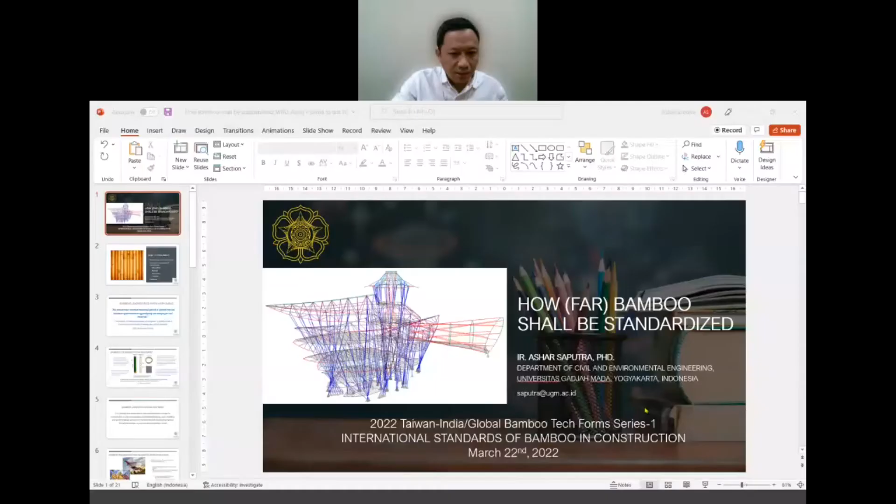Thank you, Mr. Salam. I hope my voice is heard clearly. Yes, okay. Thank you everybody, it's a good honor for me, Mr. Salam, and also the colleagues from Chung Cheng University in Taiwan.

Today I would like to share my experience, also my difficulties during the construction of bamboo, especially for big buildings of bamboo. Before I start, I'm a structural engineer, and my presentation will be much more related to the structural or civil engineering aspect. So hopefully all participants - I don't know how many here have a background in civil engineering, because I think it's much more related to structural engineering.

And I will connect my presentation with the standard code, especially for the building code. At this moment, in my experience, it's difficult to fulfill all the requirements from the code for bamboo buildings.

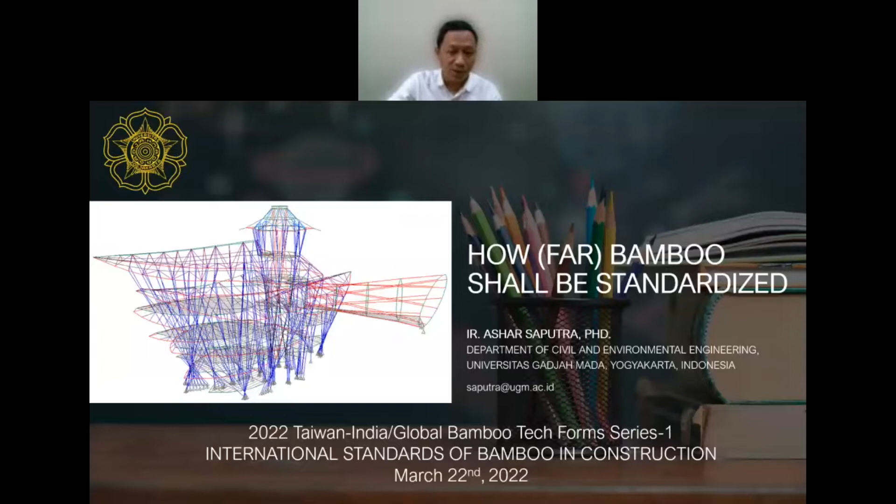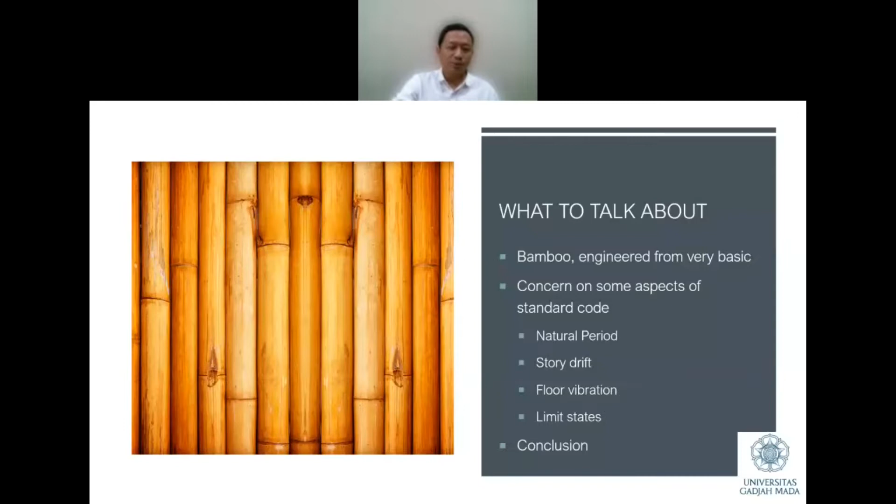I would like to talk about bamboo from the beginning, and then I would like to talk about my concerns on some aspects related to the standard code. I will discuss the natural period of the building, and also story drift, floor vibration, and then I would like to discuss the limit state design - this is, I think, the core of the standard building code. I will not talk about the material itself, because that's already been discussed by Professor Norman. So probably I would like to jump to the standard building code.

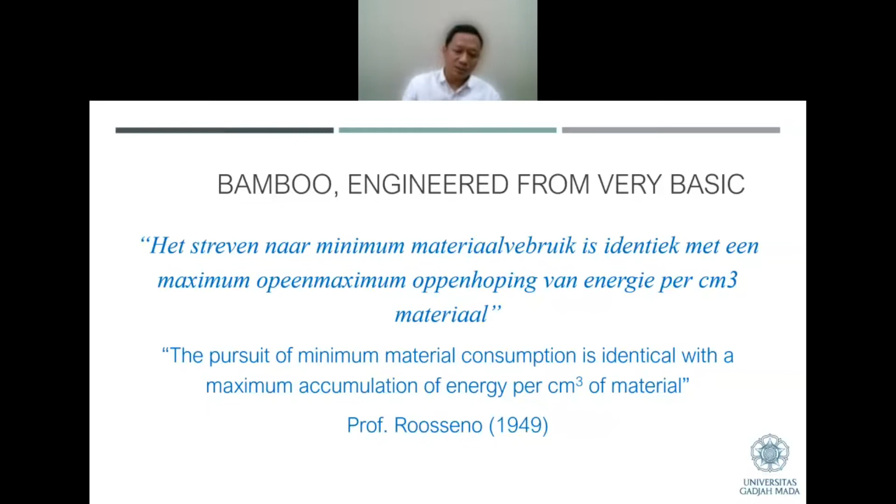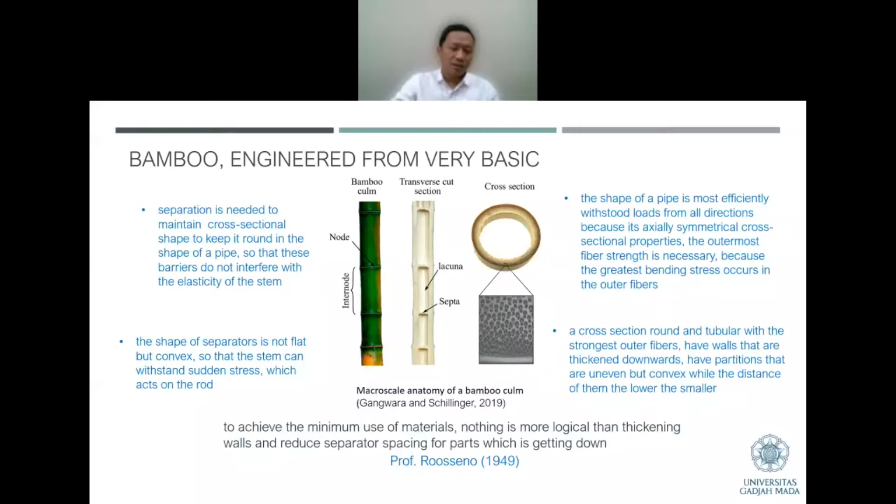Dear guests and all participants, let me start with the nature of bamboo, which is very engineered from the very beginning. I will cite my Indonesian senior engineer, who stated that the minimum material consumption is identical with the maximum accumulation of energy per centimeter cubic of the material. This principle is very, very well depicted in the bamboo material - about the shape, about the cross section, about the separators...

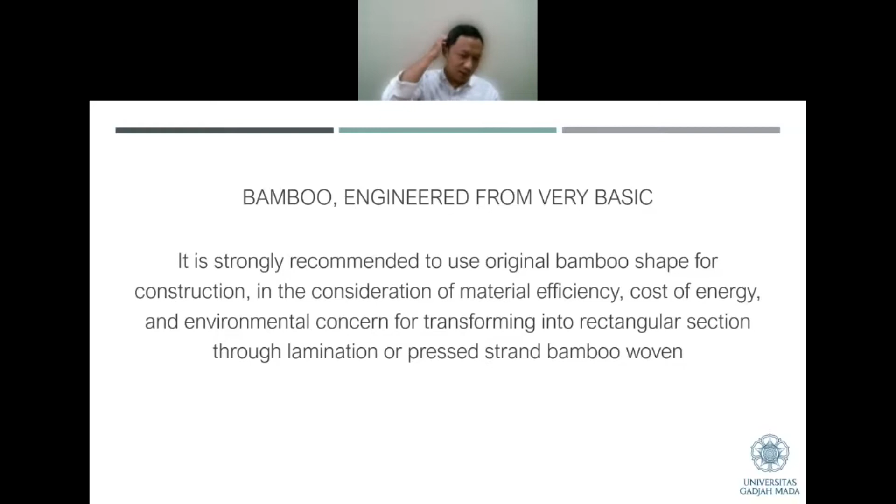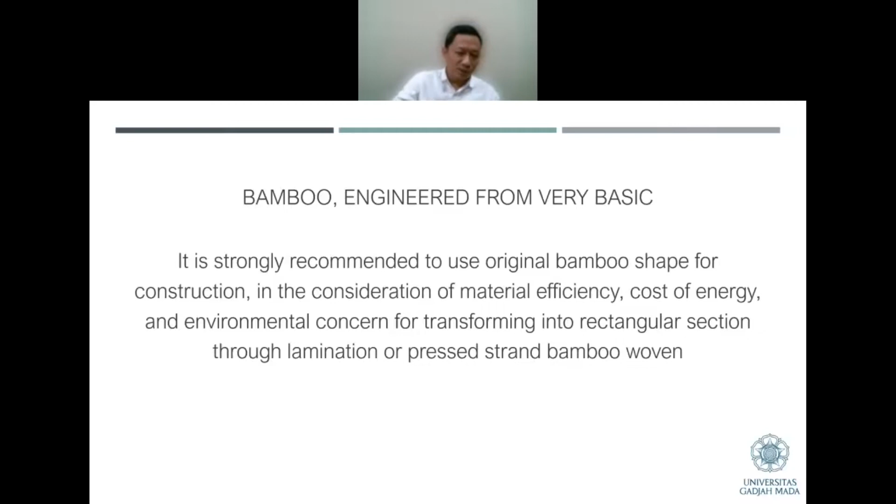It is very good to start from this point. From this fact, I would like to say that it is strongly recommended to use the original bamboo shape for construction, in consideration of material efficiency, cost, energy, and environmental concerns, rather than transforming it into a rectangular section through lamination or pressed bamboo. So I would like to request all engineers and architects to please design bamboo buildings using the original shape. If we try to utilize bamboo through laminated bamboo or strand-pressed bamboo, I think it will not match the requirements for energy cost and environmental consideration. So let's start with the original shape. Originally, bamboo is already amazing, strong, and very good for construction. So this is my opening for understanding bamboo.

So when I'm thinking about the code, I'm thinking about appropriateness. Should bamboo come to be very standardized, or should it just come to appropriateness? How about bamboo building - can we learn something from this situation? This also gives me some kind of insight, because after 10, 14 years dealing with bamboo, it is strongly and hardly difficult to fulfill all the requirements of the standard building code. I will explain the situation case by case, but this brings me to understand that sometimes appropriateness has to be fulfilled rather than only fulfilling the requirement from the code.

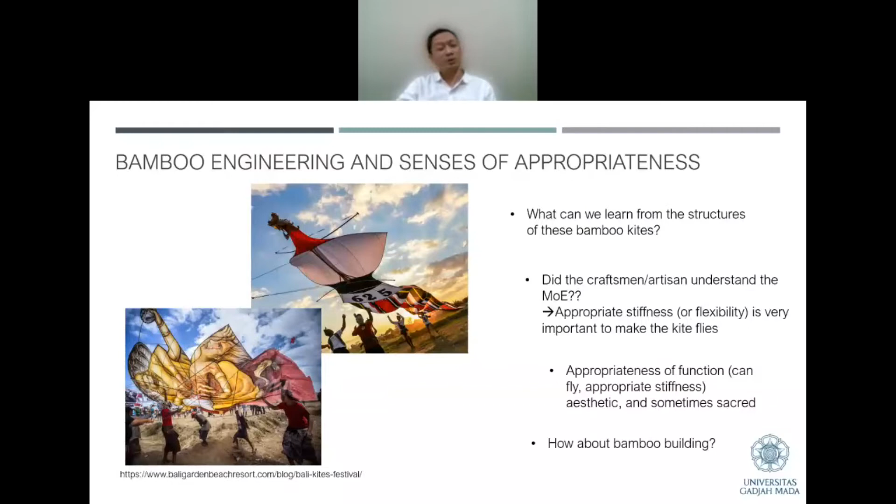So we would like to talk about standard building code in relation with bamboo building. I will start with the design life, and then the fundamental or natural period of building. All these aspects should be taken into account during structural design. Then how about the interstory drift, the floor deflection and vibration, and the wind load? At last, I would like to discuss the limit states, including ultimate limit states, serviceable limit state, and durability limit states. I think this is very challenging for all of us, especially for the architect and the structural engineer.

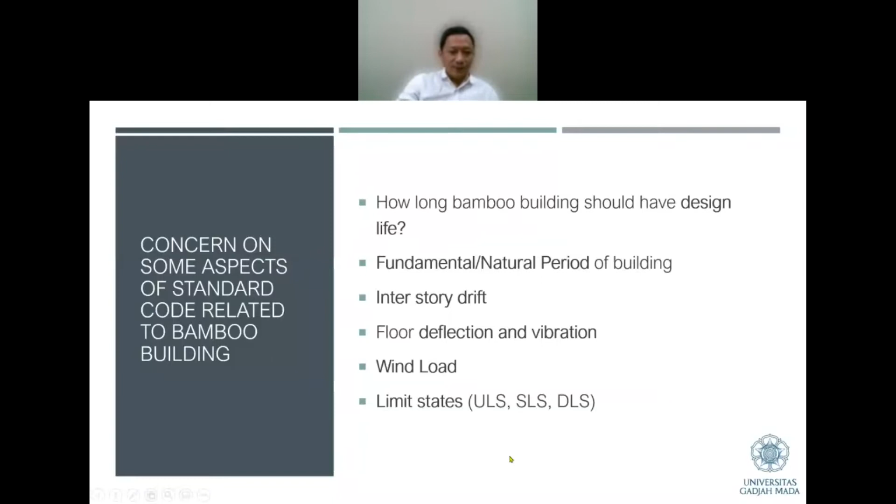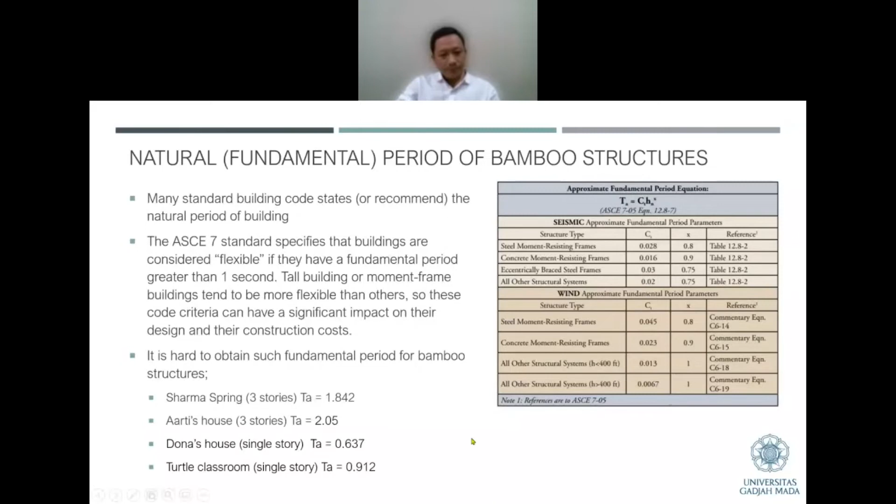I will show you that if our structure is relatively cubical or regular, like the lodge in Belgium, 2011, you can see the shape of the building is much more regular, and we can get the natural period around 0.3. It's a stiff building, and probably not really affected by wind load.

But for the Sharma Spring in Bali, this three-story bamboo building, also constructed in 2011, I got the natural or fundamental period around 1.8. So it is flexible. Sometimes if the wind blows at relatively high speed, probably some sway will happen in this structure.

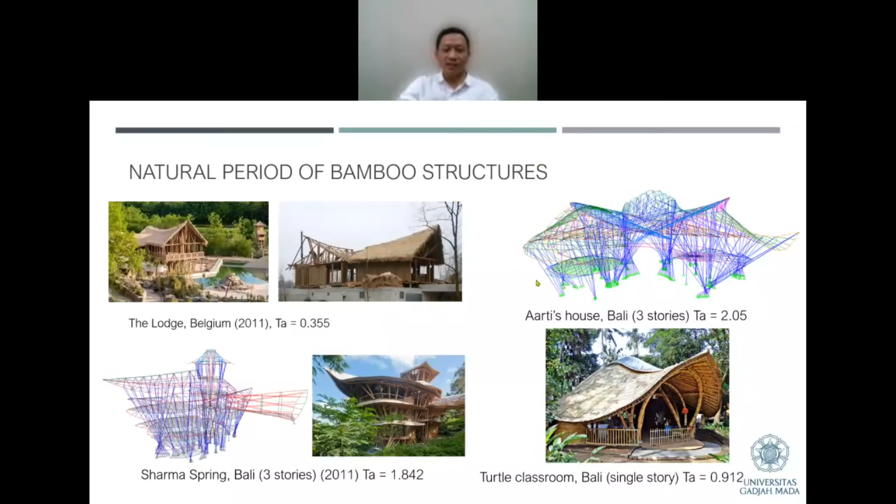For Aarti's House, we get a higher fundamental period due to the heavy mass on the roof system, so we get 2.05. In this situation, the engineer and also the architect have to give appropriate explanation about the design and the natural period of the building.

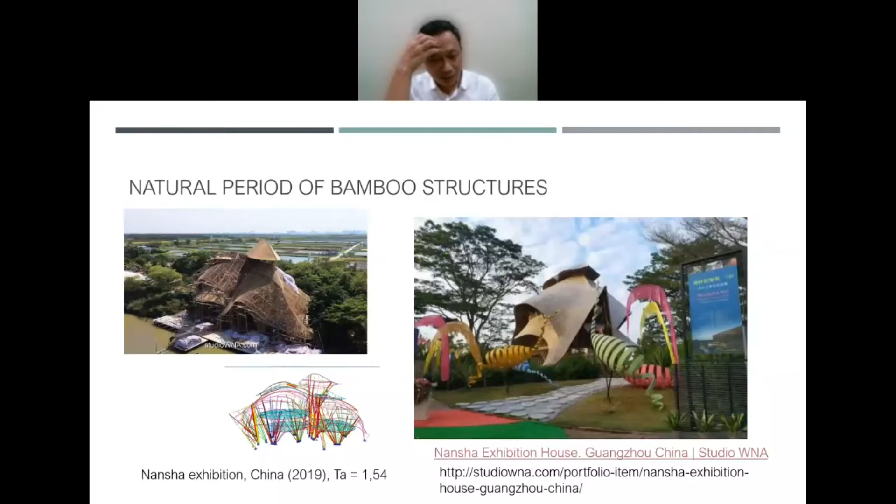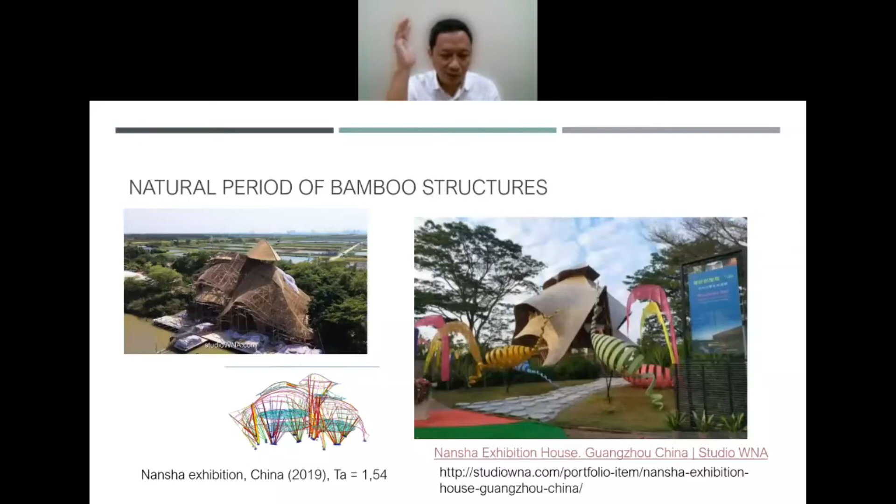The last example is the Nansha exhibition in Nansha Bird Park in Guangzhou, China, constructed in 2019. These pictures belong to WNA Studio, and as you can see, the fundamental period of this building is around 1.5. So this is the situation. In this regard, it's difficult to make our bamboo building become a stiff building, and sometimes a relatively big sway will be received or seen in our structure.

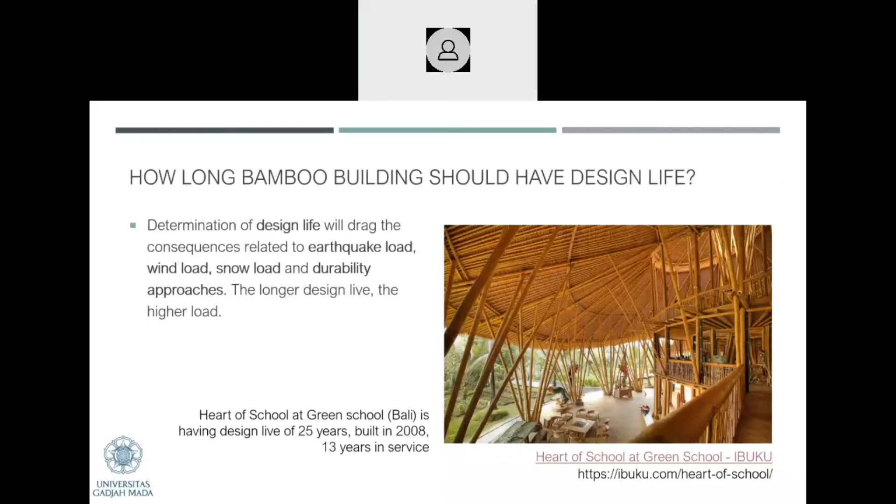In a normal situation, the standard building code for public space or normal buildings usually requires a minimum 40 years design life. But from my experience, 25 years design life will be appropriate in many aspects due to durability and economics. So let's determine between the architect, engineer, and owner about the design life. Don't give misinformation to the owner that our building is designed for 40 or 50 years service life, because probably it will be difficult to achieve.

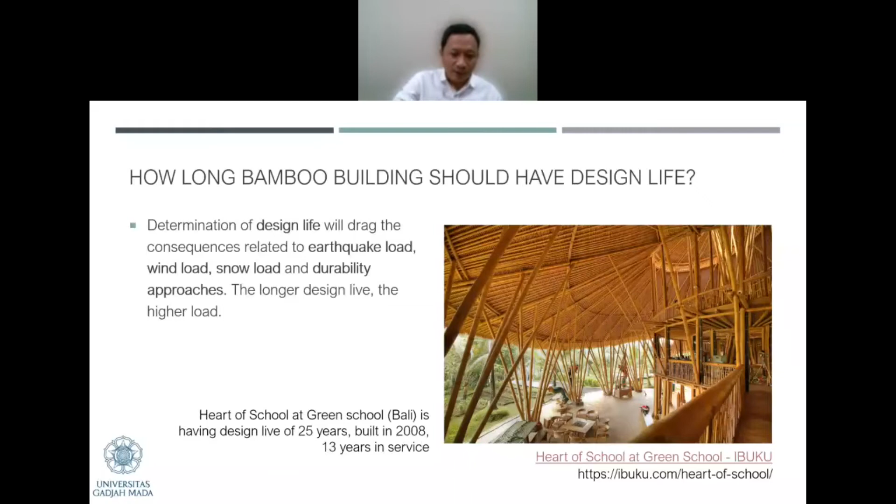The third thing I find very difficult to fulfill from the code is related to story drift, or inter-story drift. In normal buildings, the code states the drift to be 1%, 1.5%, or 2%, related to the importance function of the building. For a hospital, probably only 1% story drift is allowable. For housing, probably 1 or 2%. For office buildings, the code usually states 1.5%. But in reality, it's very hard.

Why? Because in bamboo structures, the connection plays a very important role in determining the inter-story drift. The nature of bamboo, having low MOE, 1/200 of steel or half of wood, has become the challenge in keeping the inter-story drift from being too high. The second problem is related to the property of the joint connection. This is the challenge I'm facing during the construction of bamboo structures.

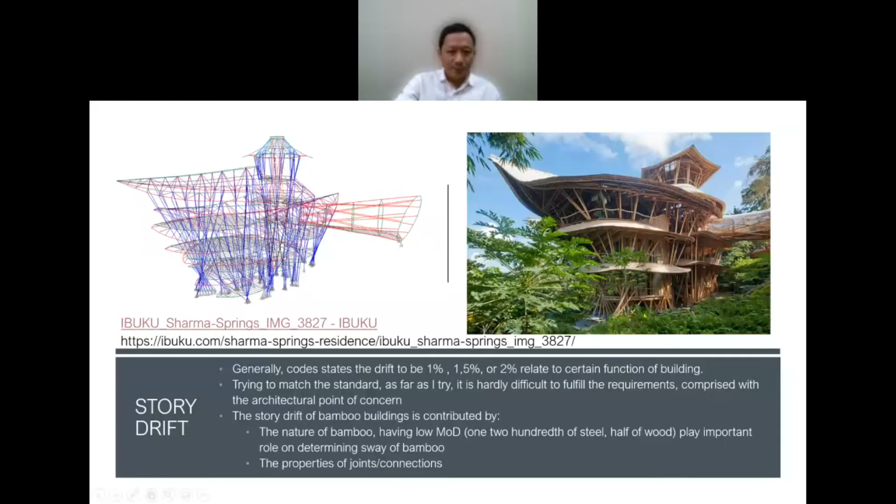The next issue is related to floor vibration or floor deflection. The vibration of the floor relates to the strength, the capacity to withstand load, and also serviceability. Usually standard building code states span over 400 or span over 300. But in bamboo structure design, span over 400 is almost impossible to reach, and span over 300 is also difficult. Span over 250, I think, is the compromise point.

Why? Because if we want to reach span over 400, the floor beam will be very big, and the architect will say, I don't like this big beam. So at which point do we compromise? I'll say span over 250 is the compromise point. But the easiest, and usually what I use as the limitation, is span over 200. It's easier to obtain - the architect will agree, and there will be some vibration and a little deflection, but the user will still be okay with it.

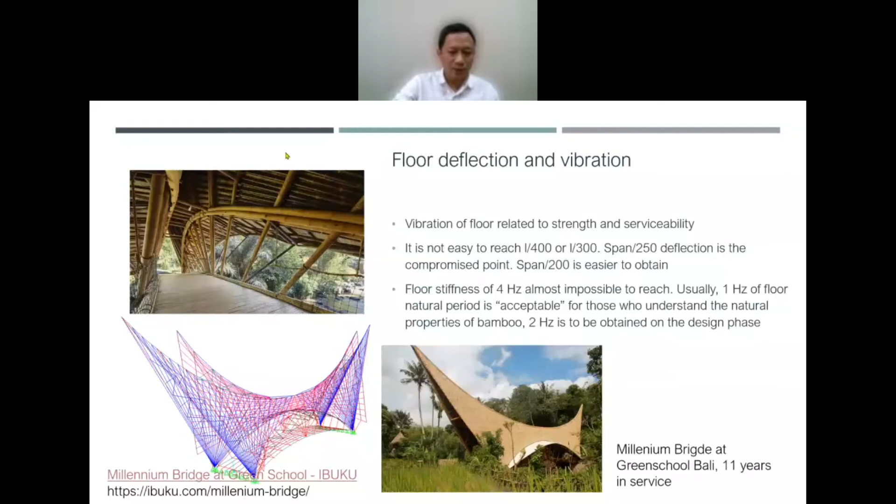Sometimes we have to design arches with a higher curve to get steeper floor vibration or to increase the stiffness of the floor. Yes, this is kind of a challenge in structural design, how to match with certain requirements of the building code.

The next topic is about the wind load. I contacted a client, an architect designing in the sub-equatorial region, which requires a standard load of more than 150 kilometers per hour.

When I came to the calculation and went back to the architect, I said if you ask me to calculate for more than 150 kilometers per hour, then I need, let's say, 6-fold the columns. So what do you think?

Then the discussion comes to an agreement: okay, we can design for 150 kilometers per hour, but we will need some kind of exit strategy, which is when the wind speed exceeds the design speed, some part, usually the roof covering, will be blown away, but the main structure will stay intact.

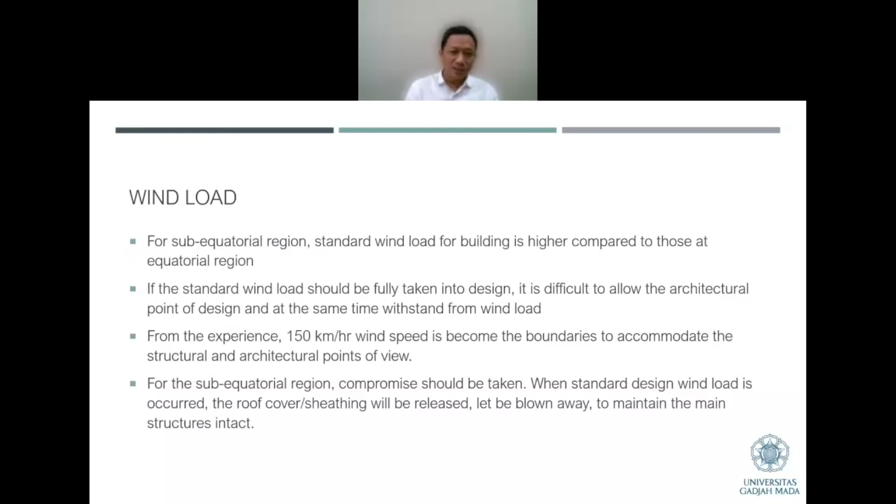Then the user or owner says, okay, I can accept that, so we can proceed to the further step of the design. The architect usually agrees, but the user has to understand the situation about the bamboo calculation, the bamboo properties, and so on. So this is when we discuss the wind load.

Ladies and gentlemen, next I would like to talk about the limit state design for bamboo. The limit state design approach considers that the structure should sustain all loads and deformation liable to occur during its construction, perform adequately in normal use, and have adequate durability.

The aspect of the ultimate limit state is about loss of equilibrium, rupture, and so on, including fatigue. For the serviceability limit state, it includes excessive deflection, excessive cracking, excessive undesirable vibration that I already presented to you, and some kind of special limit state due to abnormal conditions about durability, collapse, extreme earthquake, corrosion, deterioration, and so on.

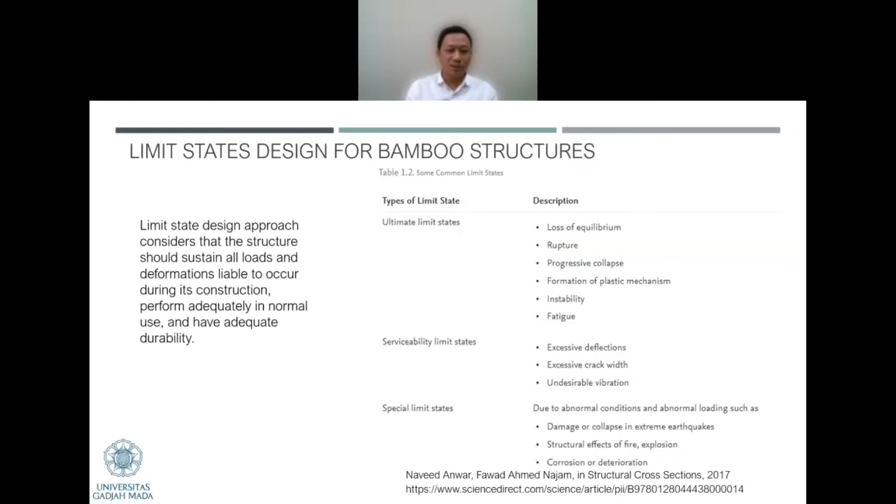So how do we try to match the situation of bamboo with this kind of consideration? I would like to cite what Anwar and Najam state in their paper: for limit state design, usually we play with the characteristic value of the material as the basic strength, and this brings material safety, then comes design strength, and then we apply member safety.

On the other side, we try to understand the characteristics of the load, then get the load factor, then come to the design load, and then to the structural analysis factor. So this is part of the evaluation of the standard code—I think we are here in the fifth step of understanding the building structure.

We are talking about the introduction of capacity-based design approach. But for bamboo, as I explained previously, it's really difficult to follow this capacity-based design approach. What I propose is that it will be more appropriate if we follow a performance-based design with more explicit linkage between demand and performance.

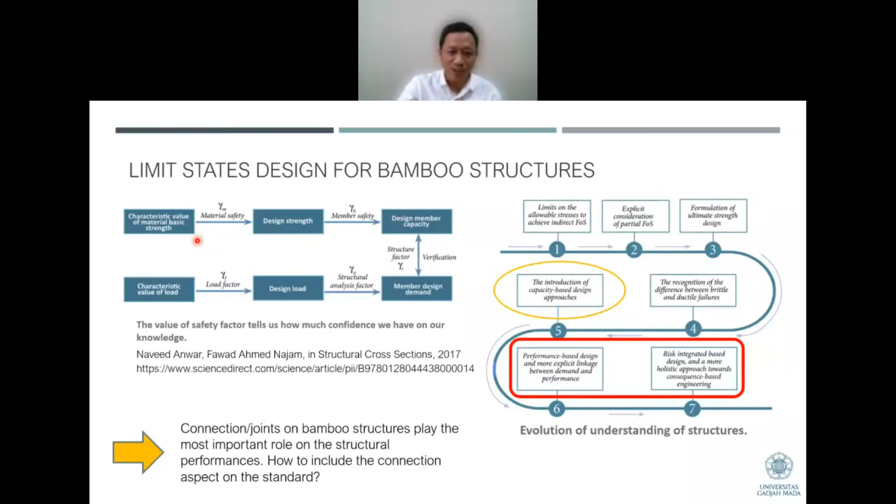How do we include the connection aspect in this standard? If we're talking about the material, fine—Professor Normando already explained this. I think with the ISO and Indian standards, we already have many, but when it comes to the whole structure, I think it's not sufficient. We have to come to another approach, which in my thinking is performance-based design. I will explain the situation about performance-based design.

This is the project I was involved in, the development of a community center in Buntoi, Central Kalimantan, funded by the United Nations Office for Project Services in 2012. At the time, UNOPS sent ARUP engineers to act as a second engineer, to check my calculation and my design. After several hours of discussion with the ARUP engineers, they said, how are you so sure about the performance of the structure?

What do you want me to do? Do a loading test. Okay, then we did the loading test. This is the kind of performance-based design.

Sometimes the calculation is not very clear, and sometimes it's not very sufficient for other engineers. So this is the way we can ensure that our calculation is sufficient. This is the kind of loading test I did in the field, 48 hours of loading, both vertical and horizontal, for the uniform floor load. We also measured the deflection and so on. This kind of calculation is easy to understand for many engineers in many regions, because it just uses the standard principle of engineering. So this is why I'm thinking about performance-based checking of the structural performance of our building.

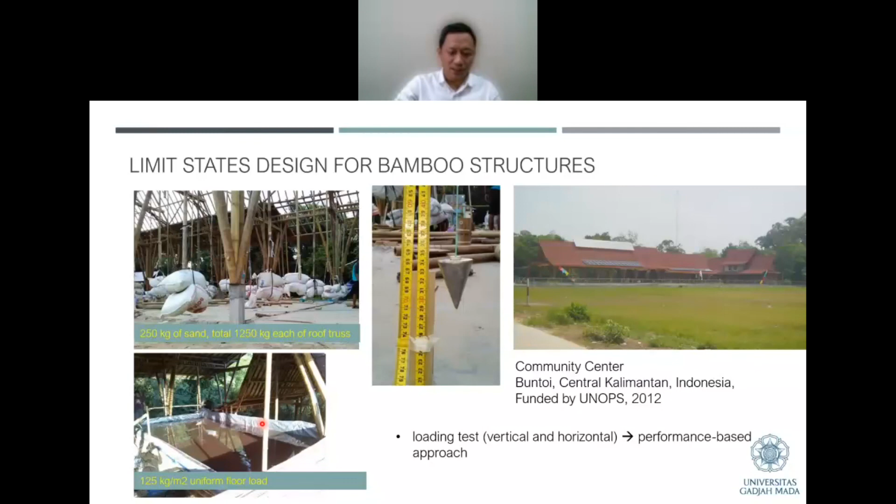We are not talking about durability in this performance-based design. So the challenge related to the performance of structures is about connection, because this is again really hard to standardize, and also about material deterioration due to climate. It's also about how to maintain it, and this has to be discussed from the very beginning. The architect has to understand this risk, about material deterioration due to weather.

And sometimes, as the previous presenter said, there's insufficient or inappropriate method during construction, about workmanship, about the tools, about how to avoid splitting—everything needs a very good process during construction. So it's also difficult to standardize. Of course, compared to steel, compared to concrete, we have a very clear standard during construction, but it's difficult for bamboo structures.

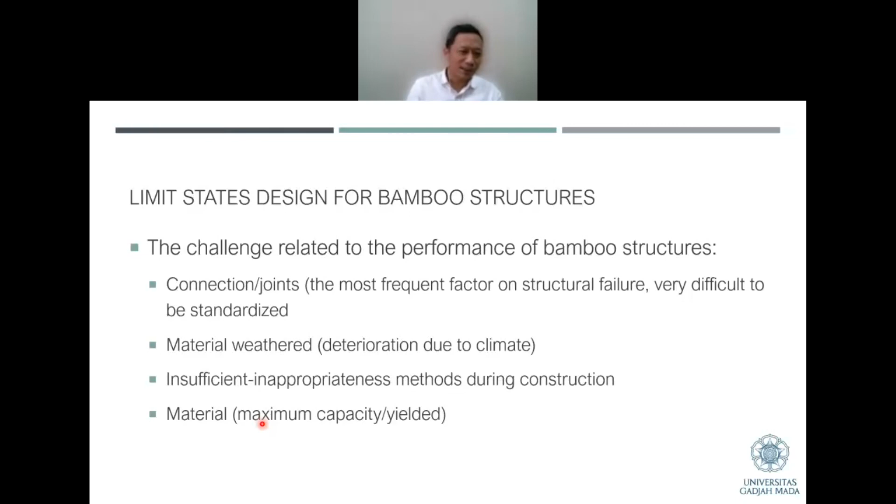And lastly, I think the yield of the material plays a lesser role in the failure of the structure. In my experience, I've never seen bamboo fail in terms of material yielding. So this is the less significant aspect when we are talking about limit state design for bamboo structure.

So in conclusion, the design of bamboo structure should consider a compromised design life agreed between owner and designer, and we also have to stay on the conservative side. Even though the catastrophic risk due to bamboo failure is probably small, because bamboo is a lightweight material, bamboo structures usually have a longer fundamental period, making them more sensitive to wind rather than earthquake.

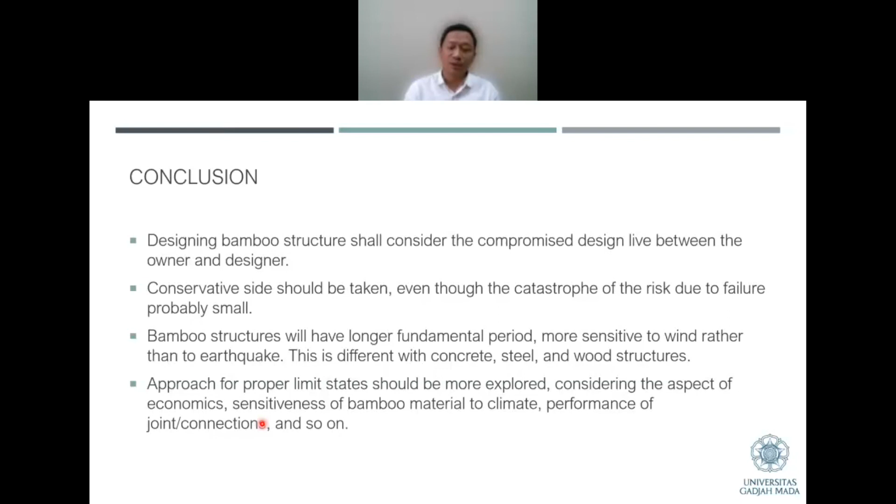So I think this is a good point if we are in a seismic-prone area—the approach for proper limit states should be more explored, considering the aspect of economic sensitivity of bamboo material to climate, and the performance of joints and connections and so on. I think this is my closing statement for now, and thank you very much.